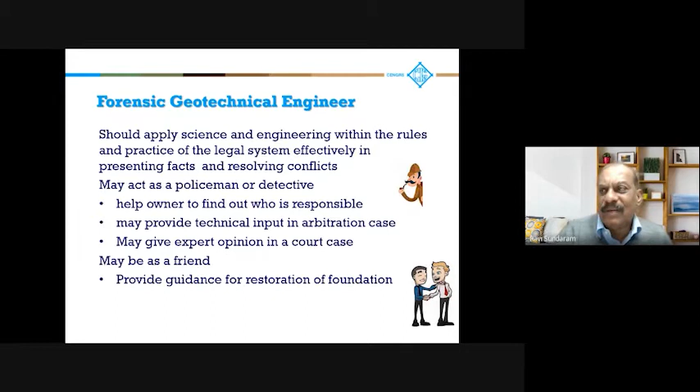So the forensic geotechnical engineer should apply the science and engineering within the rules and practice of the legal system to effectively present the facts and resolve the conflicts. As I told you, you may act as a policeman or a detective to help the owner find out the problem, who's responsible, or he could be a friend.

Forensic geotechnical engineering obviously involves identifying the problem, investigating the root cause, assessing the risk, reviewing the structural and geotechnical data, structural details, geotechnical data, predicting your foundation behavior, performing a back analysis if the data is available, identifying the causes of failure and risk.

So forensics basically involves examining the evidence and trying to figure out exactly what happened, and then you could develop technically feasible solutions, review merits and demerits, select the final solution, implement and monitor that solution, and mitigate foundation distress.

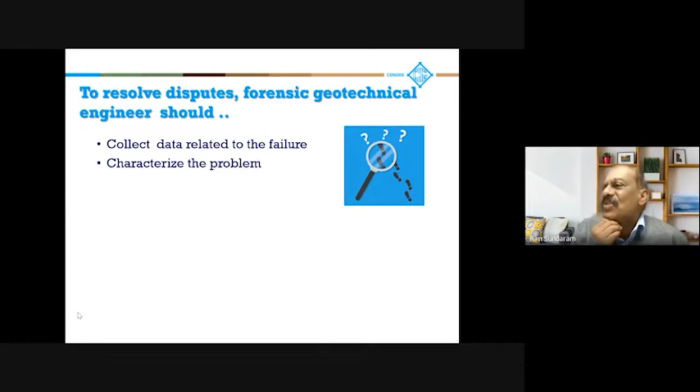To resolve the disputes, the forensic geotechnical engineer should collect data related to the failure, characterize the problem, develop a failure hypothesis, perform a realistic back analysis. That's the most critical thing. Record field observations and, if feasible, monitor the performance.

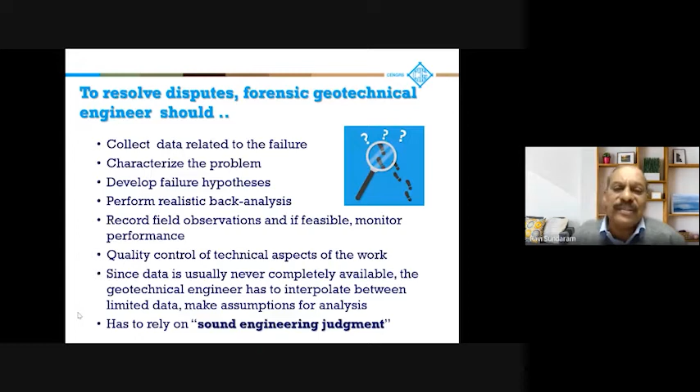Quality control of technical aspects of the work has to be done. Since data is usually never completely available, the geotechnical engineer has to interpolate between limited data and make assumptions for the analysis. So therefore, he has to rely on sound engineering judgment. That's the key word here, sound engineering judgment.

Forensic geotechnics is as much an art as it is a science. Today morning, Professor Madhav must have talked about geotechnical engineering is a science, but its practice is an art. As far as forensics is concerned, the art and science merge together.

And then you come up with solutions. What are the alternate schemes? Review the merits and demerits of each scheme, recommend the final scheme, and then we have to implement it so that your project remains safe and sound.

Identifying the root cause, this is the most critical thing. When there is a distress, it could be foundation distress or a structural distress. As far as the geoprofessional is concerned, he has to act as a doctor with a healing touch, resolve the problem.

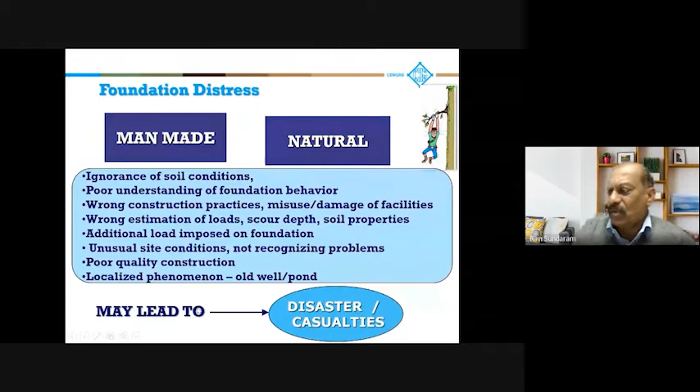So when we talk about foundation distress, we have settlements, shear failure, and serviceability issues. Settlements could be total settlement or differential settlement. And in serviceability, we could be talking of excessive settlement or a lower factor of safety or displacements which are not acceptable.

Basically, the approach is the same as forensic, preferably without involving the court of law. So the legal system here is the basis, but if we can bypass the law, the court, the problems could be solved much more easily by the engineers.

So to mitigate distress, you want to ensure that the desired factor of safety is achieved. You meet the serviceability criteria. Restrict further distress or settlement. If some settlement might have taken place, you want to make sure that there is no further settlement.

You may want to allow additional loads. The structure may have to carry additional loads. Maybe there is a vertical expansion or additional kind of stresses coming on the foundation. And to facilitate adjoining constructions, make sure that there is no disturbance to the adjoining construction.

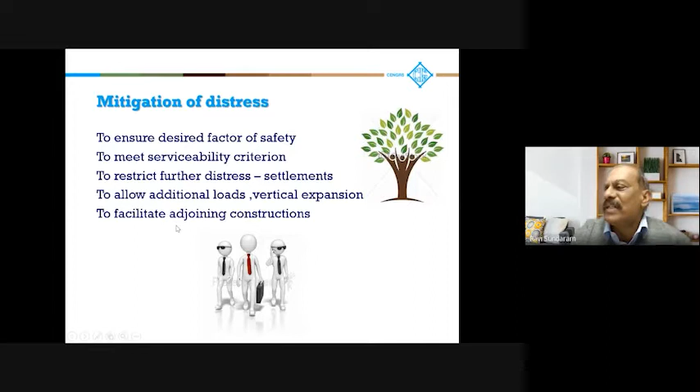So if you look at mitigating distress, what you are looking at is you want to know the geology of the area and the soil details, the foundation details. Select the adequate, correct techniques for investigation. What kind of tests need to be done? Perform these tests and then assess the reasons for failure, the nature of distress. Select your design profile and do your analysis to assess how this problem can be solved.

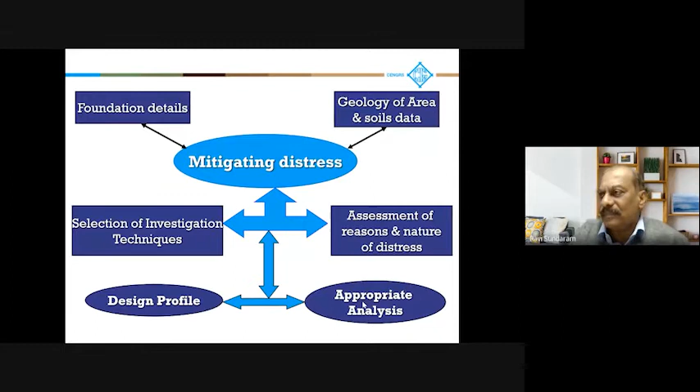Ideally, to mitigate distress, you would want to take steps before the disaster strikes, or on noticing the first signs of failure, take preventive actions to avoid it. An experienced engineer can identify telltale signs of potential failure and suggest remedial measures. If implemented in a timely manner, the failure can be avoided or at least its impact minimized.

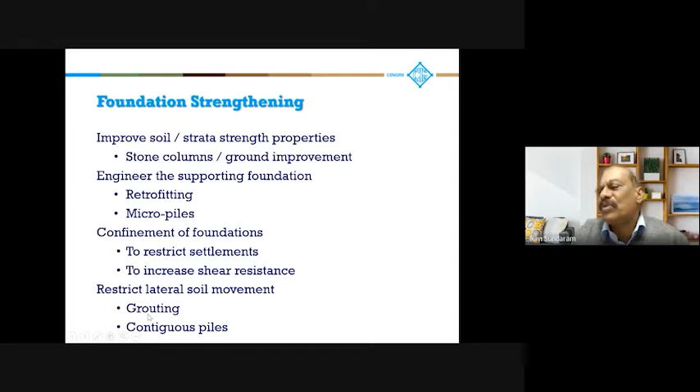Various foundation strengthening measures are available, just a brief list, there are many more. You may want to improve soil strength characteristics, go for stone columns or other ground improvement techniques, engineer the supporting foundation by retrofitting or micropiles. Confinement of foundations may be done to restrict settlement and increase shear resistance. Restrict lateral soil movement by grouting or contiguous piles.

Why distress occurred is something we have to understand. If there is an actual failure, we may be able to back calculate the soil parameters, so then you can do your design accordingly. If there is a partial distress or a serviceability problem, you may not be able to do the back analysis, so it requires the ingenuity of the engineer.

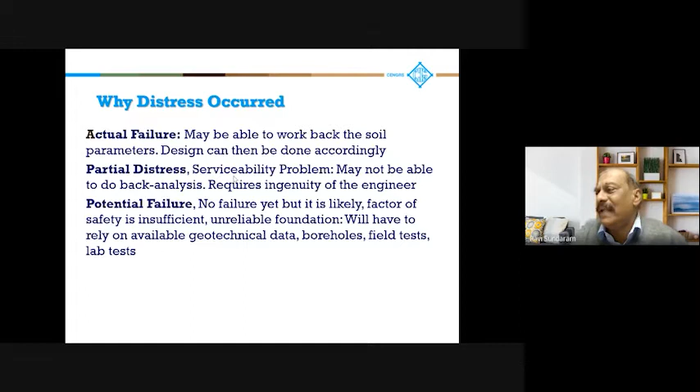A potential failure, no failure yet but it is likely, may occur when the factor of safety is insufficient or you have an unreliable foundation. You have to rely on available geotechnical data, boreholes, field tests, and lab tests, and try to figure out if something is likely to happen.

So we need effective solutions in all these cases that can be implemented easily within a short time span, with locally available technologies that are cost effective.

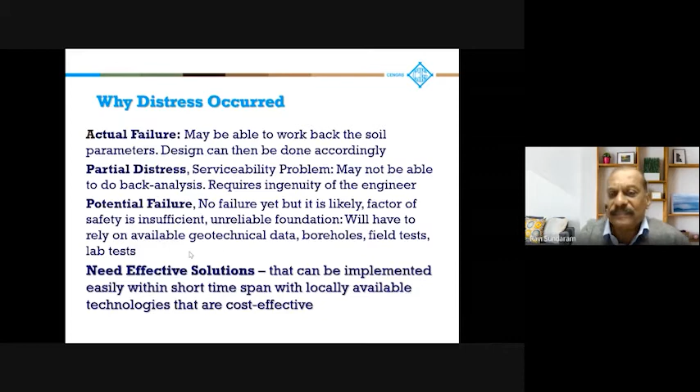What went wrong, where, and why - these are the 4 W's of forensics. The 4 W's guide any forensic investigation and are the key to understanding the problem and developing an appropriate solution. This can guide you towards a solution, where you assess the likely foundation system required to ensure the structure is safe.

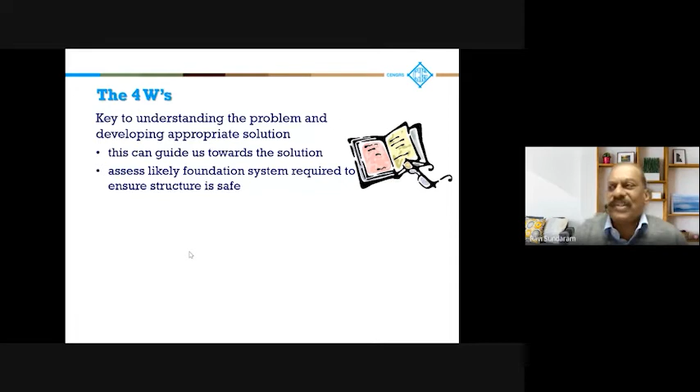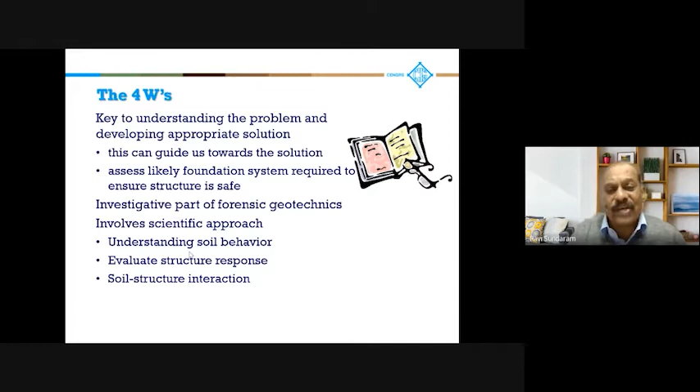This is the investigative part of forensics. When we talk about forensic geotechnics, we are investigating the reason why the failure occurred or is likely to occur. It involves a scientific approach. Understanding of soil behavior is most important, and then evaluating the structural response and soil-structure interaction. Understanding what triggered or caused failure can provide insight to the type of restoration required.

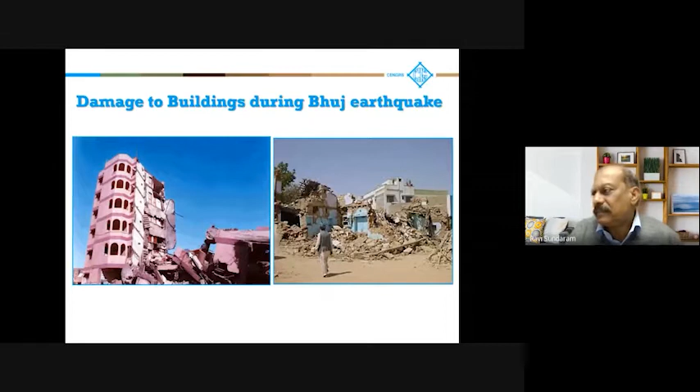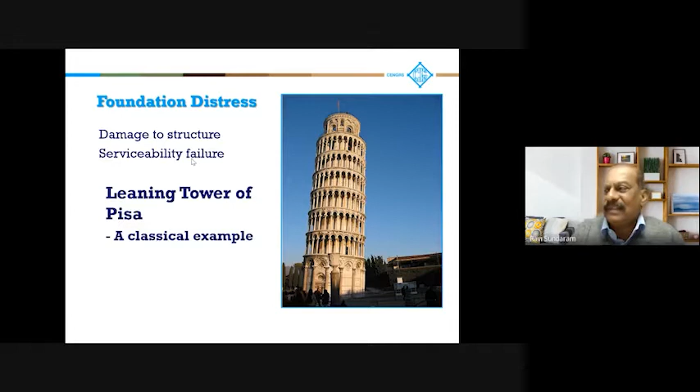The famous Leaning Tower of Pisa is a classical example where the structure is still standing. The main problem is serviceability - there is still no damage, and various techniques have been used to stabilize the tower and keep it at the same angle without further distress.

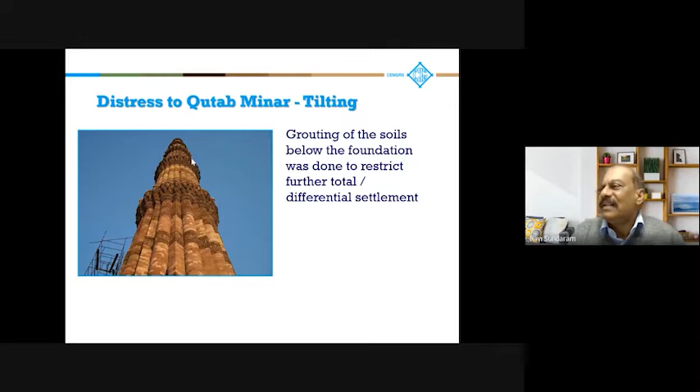Qutab Minar has also undergone some tilting, and some grouting has been done below the foundations to restrict further total and differential settlement.

Now I shall be presenting 3 case studies to demonstrate the application of the principles of forensic geotechnics, primarily the 4 W's, to understand how when there is a failure, we can approach the problem and resolve it.

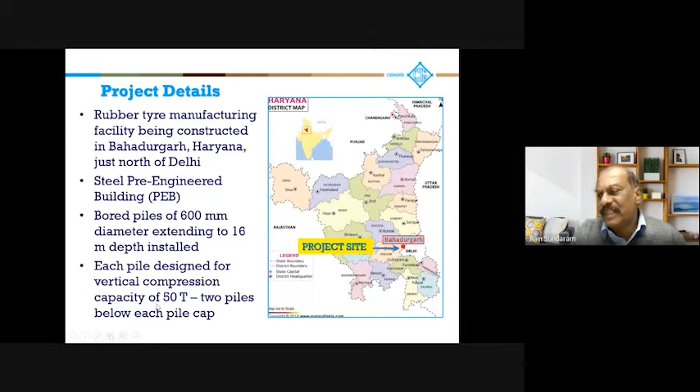Steel pre-engineered buildings were under construction. Bored piles of 600 mm diameter, extending to 16-meter depth, were installed. Each pile was designed for a vertical compression of 50 tons, with 2 piles provided below each pile cap.

During the erection of the steel structure for the pre-engineered building, settlement was observed in some of the pile caps. The measured settlements were more than 50 to 100 mm in some places. Substantial settlement was observed in the pile cap at grid BB18, which was the location of maximum settlement.

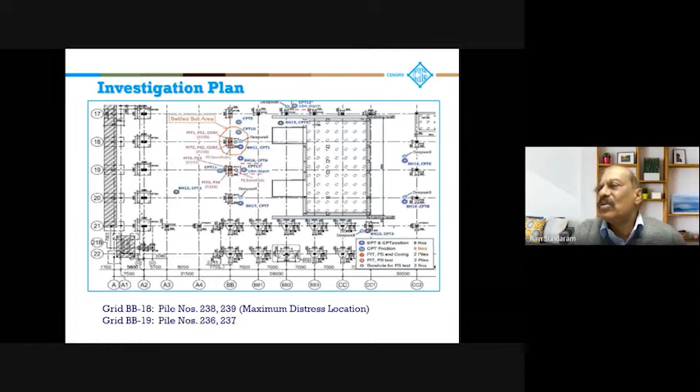This is the BB18 foundation. At BB19 also there was some distress. Pile numbers 238 and 239 were in BB18, and 236 and 237 were there. A detailed investigation program was developed.

So this is the BB18 investigation for the failure. We'll get back to you, I'll explain what we did.

The forensic post-failure study was undertaken to find out the underlying cause of the settlement prior to suggesting remedial measures. So the investigation was done in 3 phases.

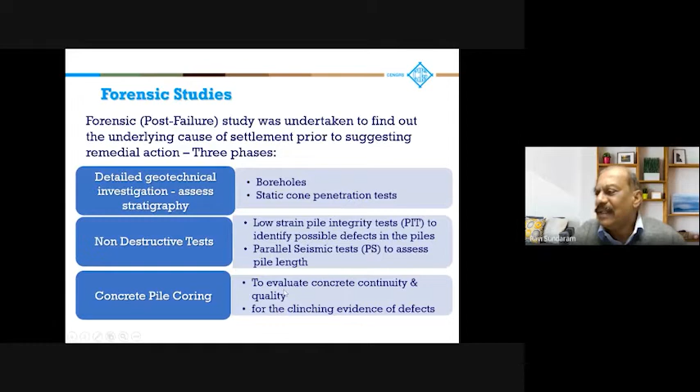One was a detailed geotechnical investigation to assess the stratigraphy, including boreholes and static cone penetration tests. Then we did some non-destructive tests: low strain pile integrity test (PIT) to identify defects in the piles, and parallel seismic tests to assess the pile length. Then we did some concrete coring to evaluate the continuity of the concrete in the pile and to assess its quality for the clinching evidence of the defects.

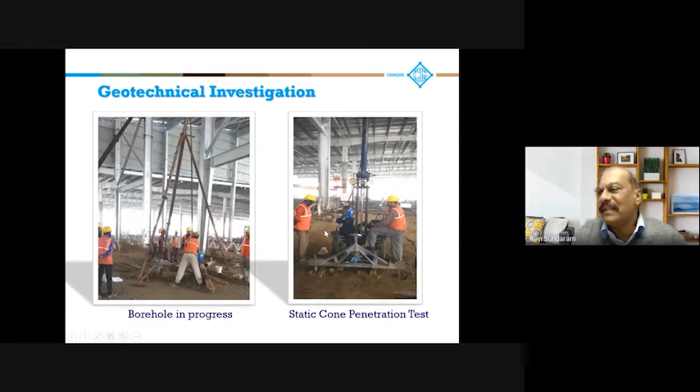The typical borehole data—this is part of the Indo-Gangetic alluvium. So what we were getting is sandy silts to 9 to 12 meter depth, and then we had sand layers below that, and then again sandy silt. What is of main concern is that if you look at the SPT values here, very low SPT values, 4 to 6 in this borehole.

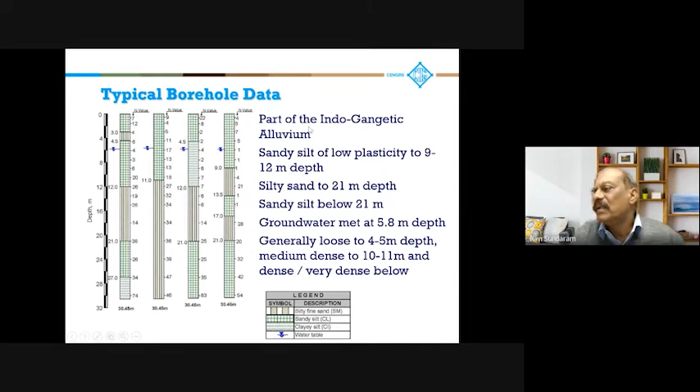Similarly, low values in this particular borehole. This one had a lot of loose soils down to about 14 meter depth, and this other borehole, also in BB18, showed very low SPT values, as low as 1, up to about 14 meter depth. So that was the strata condition.

A similar profile was seen in the static cone penetration test. A few of the tests showed very low results of cone tip resistance up to 14, 15 meter depth, mostly up to 12 meters showing low values in BB18 and BB19.

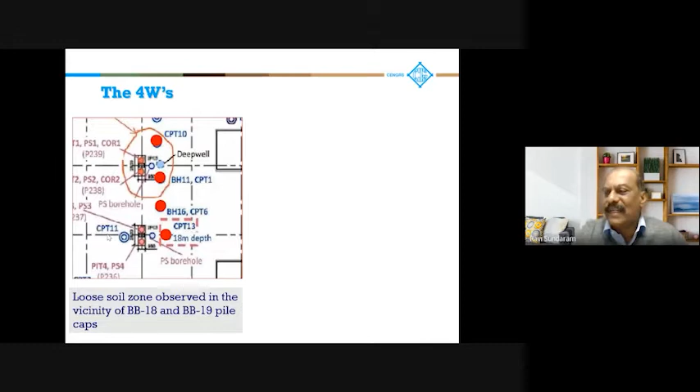Now I come to the assessment of the problem here. Number 1, it is clear that loose soil is observed in the vicinity of BB18 and 19. Two theories were put forward: that in situ conditions were varying—this was unlikely in this area.

Migration of fines caused by an improperly designed well point system located at a distance of about 10 to 15 meters—this seemed to be the most likely case for why the soil up to 14, 15 meters was loose, because of the migration of fines and low SPT values, whereas the other boreholes were showing better results. It is clear that the pile settlement was triggered by the reduced geotechnical capacity in these loose zones.

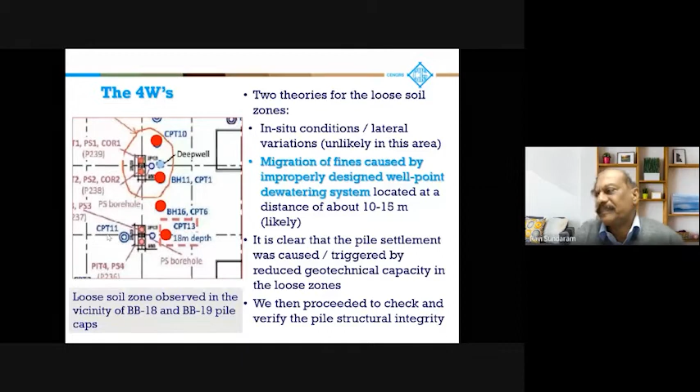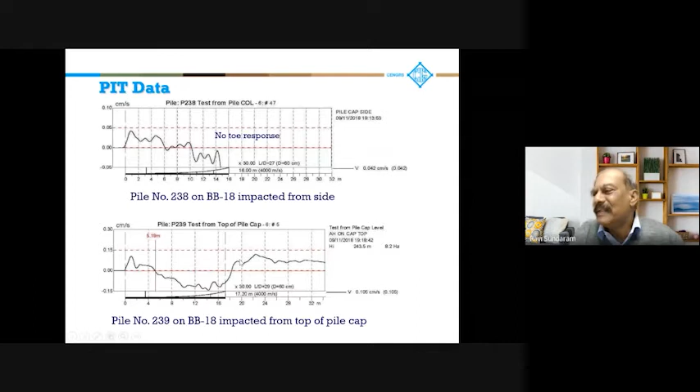So I look at this pile from P238 on BB-18—we found there was absolutely no toe response when we impacted it from this side, and when we impacted it from the top, again what we got was a weak toe. So it obviously means that there's some problem with the pile tip.

So this is the summary of the results. For pile 238, poor data shows that the result is inconclusive. Obviously, the quality of the data was inconclusive because the pile concrete quality was poor, and there was hardly any toe.

There was a strong reflection at 3 to 4 meter depth, indicating a major defect at that depth. In 239, the data indicates that either there is a defect at 6 meter depth, or the wave could not penetrate below this level.

You can see all these tests, the conclusions are after so many tests were repeatedly done on the piles, so that we just made sure that there is no error.

239, this one showed weak toe reflection at the anticipated pile tip level. And when we dismantled the pile cap, we could get a reflection at 3.5 meter depth. This showed that this could be due to bulging of the pile.

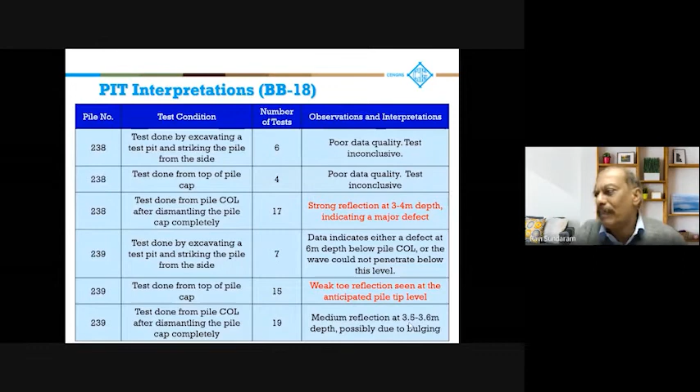So the PIT data did not match the expected trends, suggesting that there are possible defects. Both the piles, pile caps exhibited strong reflections at 3 to 5 meter depth, which masked the deeper data.

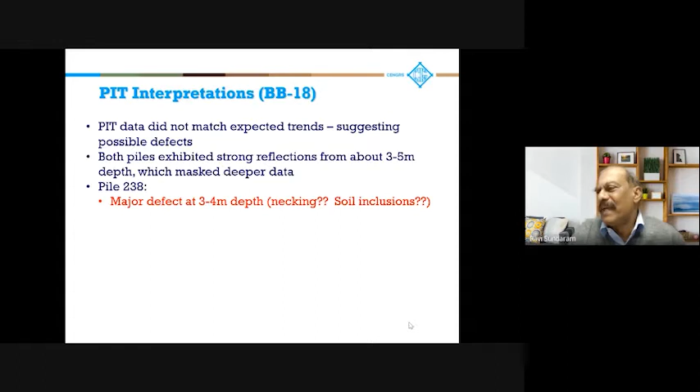In pile 238, there was a major defect of necking or soil inclusions at 3 to 4 meter depth. In 239, there was bulging at 3 to 4 meter depth, and probably collapse of the loose sand occurred during the pile boring. I'm not sure whether the pile contractor used a liner or not, but the bore has collapsed there. The pile length may more or less be okay, but the data is uncertain.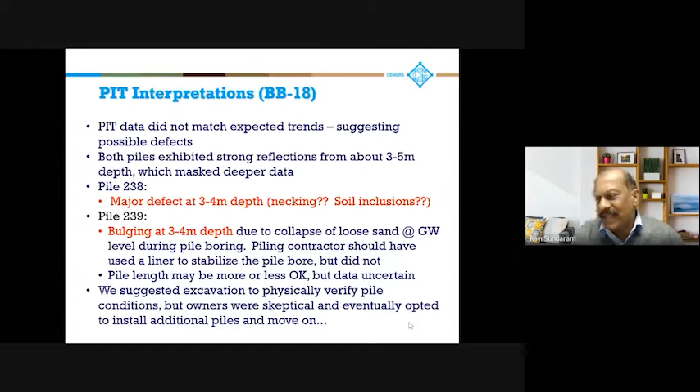Then we suggested to physically excavate and verify to about 3-4 meter depth, but the owners were skeptical. We eventually opted to install additional piles and move on.

But then we did further investigation by what is known as the parallel seismic test. So this was the pile cap, and a bore of 150 mm diameter.

It was done to about 30 meter depth, or 14 meter below the anticipated pile level, at a distance of about 1-2 meters from the pile. The borehole was cased with a 3-inch PVC casing and grouted with a cement bentonite mix, so that we have a stable hole. And the pile cap was impacted using a Teflon tipped hammer, and geophones were lowered into the hole, and the response was recorded.

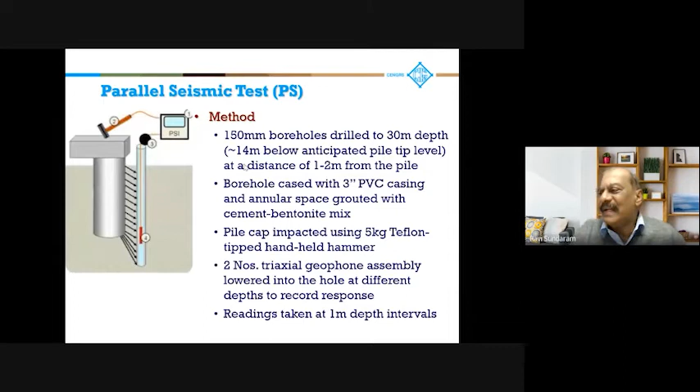Readings were taken at every 1 meter depth interval. So the concept is that you look for changes in the arrival time of the wave at the geophone location. The software computes the wave velocity based on the traveled time, distance, and the arrival time.

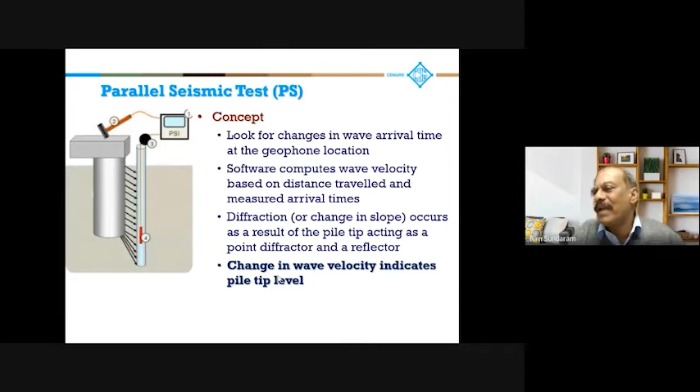The diffraction or change of slope occurs as a result of the pile tip acting as a point diffractor and a reflector. So changes in the wave velocity indicate the pile tip level. The wave would be traveling in soil rather than pile concrete.

238, it did not show any change of slope. This means it's a bad pile. At 239 pile, this showed a change of slope at 13 to 14 meter depth. So we should have expected a 16 meter long pile. So this is probably a short pile.

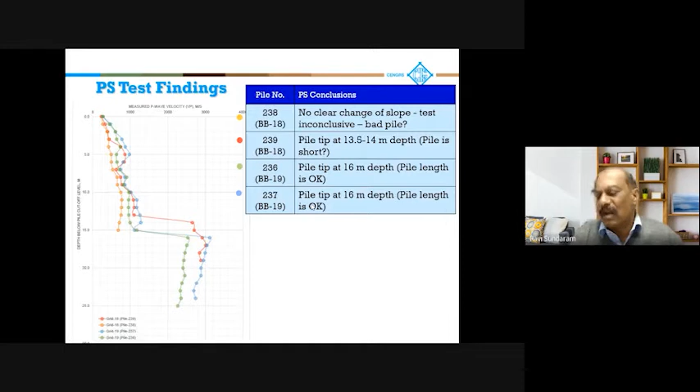236 and 237, these showed nearly 16 meter long pile. So this seems to be okay. So the key findings are that the data quality at P238 is poor, probably due to the presence of loose soils or structural defects in the concrete. 239 actually indicated shorter piles. At BB19, the pile lengths were okay.

Next, we went to coring through the pile. The objective was to confirm the structural quality, integrity, and continuity, so that you can confirm the findings of the PIT and parallel seismic test.

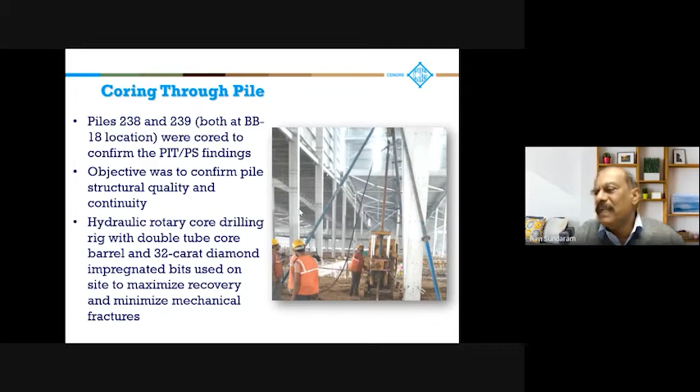So hydraulic core rotary drilling was done with a double tube core barrel, 32 carat diamond impregnated bit, to maximize core recovery and minimize mechanical fractures. This is the core concrete coring in pile 239. You can see here fractured core, and then soil and weak concrete was encountered below 12.5 meters.

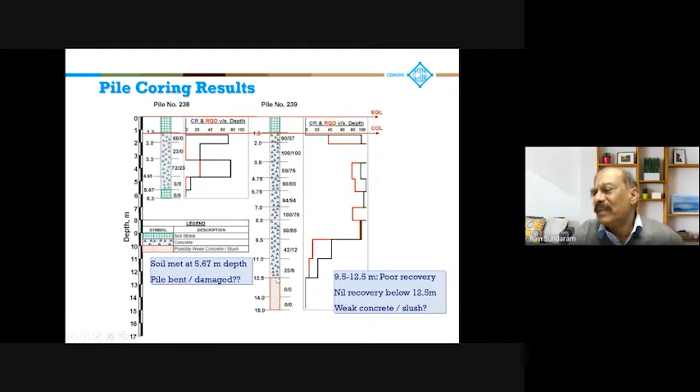This is the picture of the coring and RQD quality. So in this pile 238, in fact, we entered soil at 5.67 meters. This gave the question that probably the pile is bent or damaged, and there's no pile below 5.67. Pile 239, 12.5 meter was the concrete, and then it was showing soil below.

So this is the summary of those results, the coring observations. Bent reinforcement pieces were found in the last core run, and the pile was probably inclined and possibly damaged. Soil was encountered below 5.67 meters.

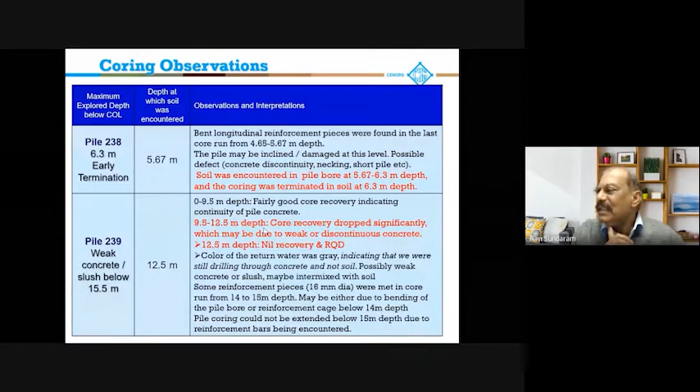In the other pile, core recovery dropped significantly due to weak, discontinuous concrete, and at 12.5 meters there was nil core recovery. The color of the return water was gray, indicating we were still drilling through concrete, not soil—probably weak concrete or slush, maybe intermixed with soil. There was also reinforcement encountered at 14-15 meter depth, either due to bending of the pile bore, or it may have gotten damaged. But there were issues.

The conclusion was that the geotechnical investigation revealed loose soil zones, and pile 238 was damaged and discarded. For pile 239, its capacity was reduced due to poor bottom cleaning. Additional piles were installed at the BB 18 location, and a similar approach was used for BB 19. The study successfully investigated the root cause of the failures, thus paving the way for remediation.

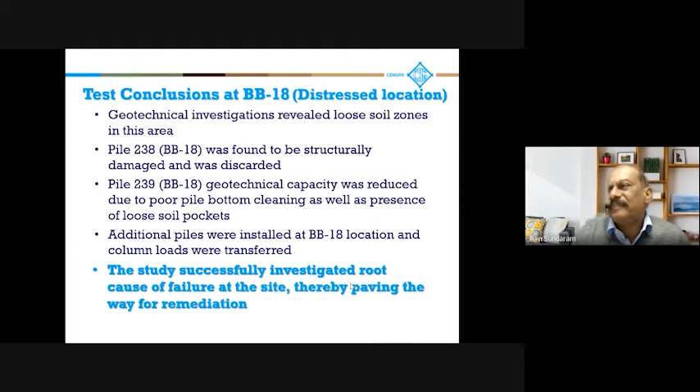I now come to another case study.

This is an overhead tank on loose boulder fill in Gwalior, Madhya Pradesh. An 18-meter overhead tank close to an existing school was planned, located in a congested area of Gwalior near the famous Gwalior fort, close to what is called the Kila Gate. There was heterogeneous loose fill of stones and boulders, probably discarded during construction of the fort, built in the 15th century by Maan Singh Tomar.

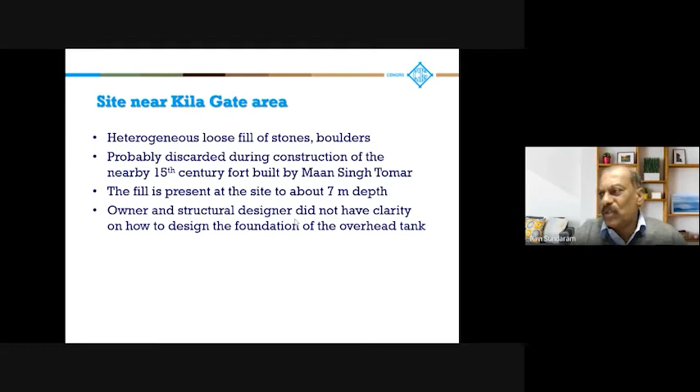The fill extended to about 7-meter depth. The owner and structural designer did not have any clarity on how to design the foundation for the overhead tank. The result was an unsafe and unreliable design.

A routine geotechnical investigation was done. The standard specification said boreholes should go to 15-meter depth or refusal, whichever is earlier. Refusal to the SPT was encountered right at the ground level itself on the boulder fill, so obviously no data was collected.

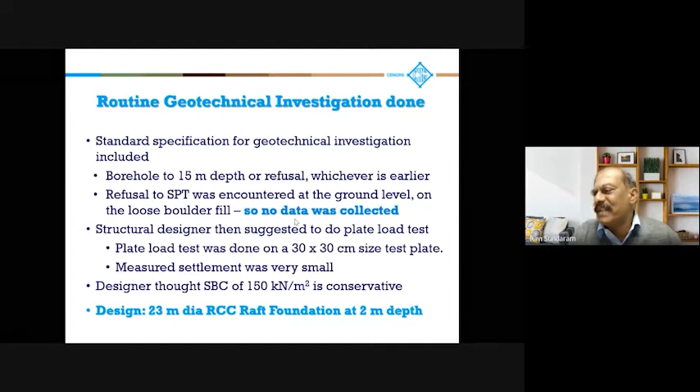The structural designer then suggested doing a plate load test, which was done on a 30 by 30 centimeter test plate. The measured settlement was very small, so the designer thought using an SBC of 150 kilonewton per meter square was conservative. As a result, he designed a 23-meter diameter RCC raft foundation at 2-meter depth.

Then they started the excavation. When they excavated to 2-meter depth, they found boulders, and continued excavating further to 4-meter depth. At 4-meter depth, a heterogeneous mix of stones and boulders in a sand matrix was also met. The contractor panicked, and the owner was concerned that the strata may not be a suitable bearing material.

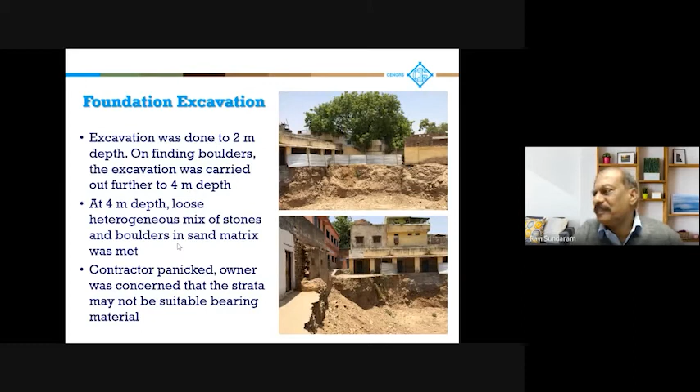At that point, the client requested IIT Delhi and Cengrs to evaluate the conditions and suggest a solution. The site conditions looked like this at the 4-meter depth excavation—stones, gravel, and boulders in a sand matrix. Some of the stones may be part of stone masonry construction; the binding material probably eroded with time or got weathered, and loose pockets were observed in the fill.

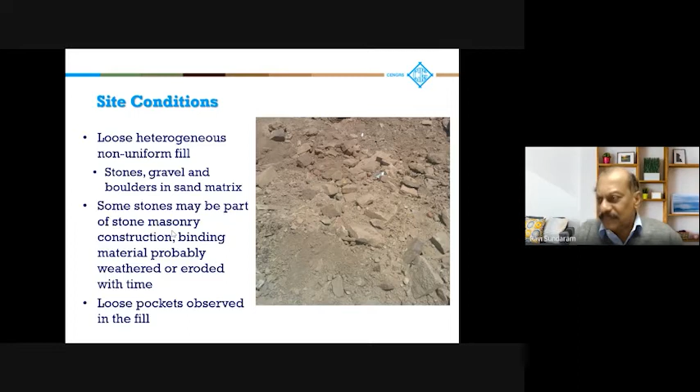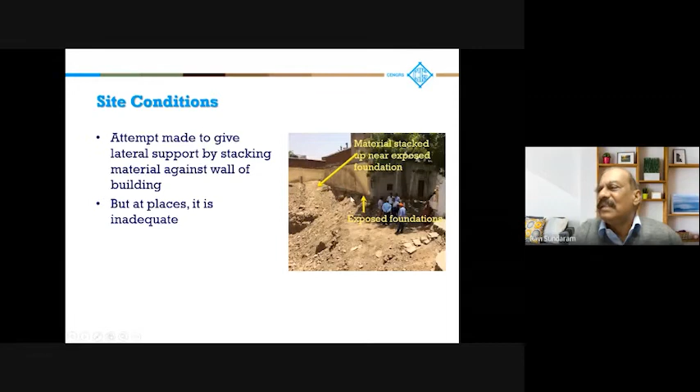Several buildings were constructed adjacent to this, in very bad, dilapidated condition, and excavation was carried out very close to these buildings with nearly steep slopes. Surprisingly, they were still stable. This is a loose stone fill on which a building has been constructed—you can see the condition; in places, the foundation has also been exposed. An attempt was made to give some lateral support by stacking material against the wall, but mostly it was inadequate.

So these were the site conditions, and the concern was the safety of the school building adjacent to the excavation. A cement mortar was used to stabilize some of those stones—obviously a very poor effort. They just applied some cement mortar and seemed to think they had done a great job there.

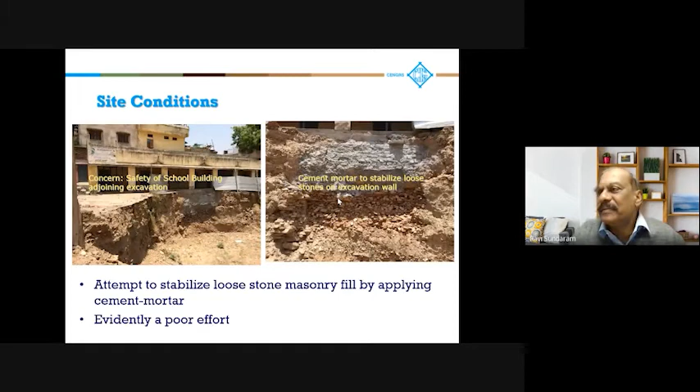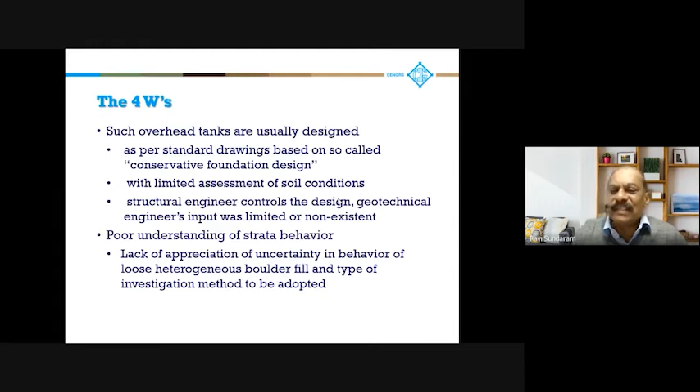Now I look at the 4 Ws for this case. Such overhead tanks are usually designed as per standard drawings based on a so-called conservative foundation design with limited assessment of soil conditions. The structural engineer controls the design, and the geotechnical engineer's input is limited or non-existent. There is very poor understanding of the strata behavior, and a lack of appreciation of uncertainty in the behavior of loose heterogeneous boulders, and of the investigation method needed to assess these problems. Since the contract had been awarded, the approved budget could not be exceeded—that was another issue.

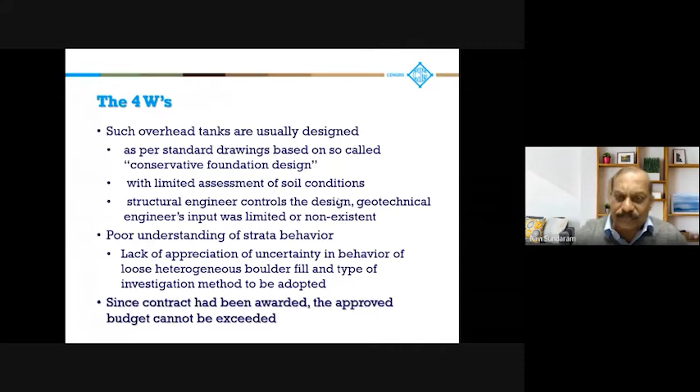An engineering assessment showed that the fill extended to 7 to 8 meter depth. Being loose and heterogeneous, it is not a reliable foundation bearing material, not suitable at all. And the available geotechnical data is insufficient.

No realistic data is there. Results of a 30 into 30 centimeter size test plate load test cannot be extrapolated for the design of a 23-meter diameter raft. No clear conclusion can be drawn. Evidently, it is not feasible to support the foundations on the boulder fill.

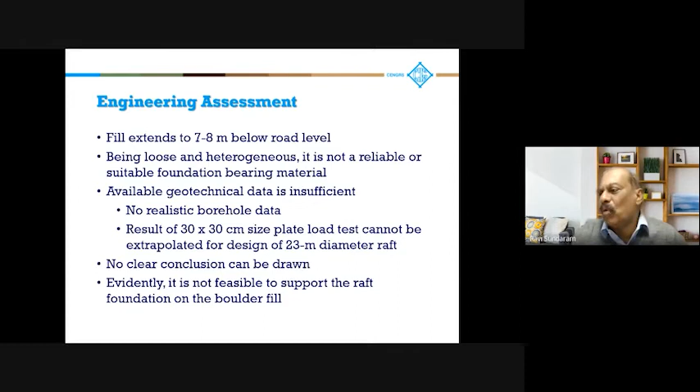So the action plan was first to perform a proper geotechnical investigation with at least 4 boreholes extending to at least 20 meters beyond the bottom of the fill. So we did the boreholes up to the 20 plus the 7-8 meters of filling. SPT and undisturbed samples were collected and a complete range of laboratory testing was performed.

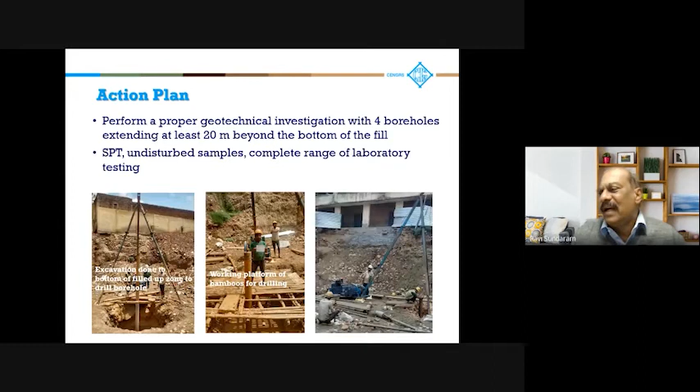So we had to excavate to the bottom of the fill zone and then erect a platform and then do the boreholes. Although the safety of the adjoining building was a big concern, no failure had been reported.

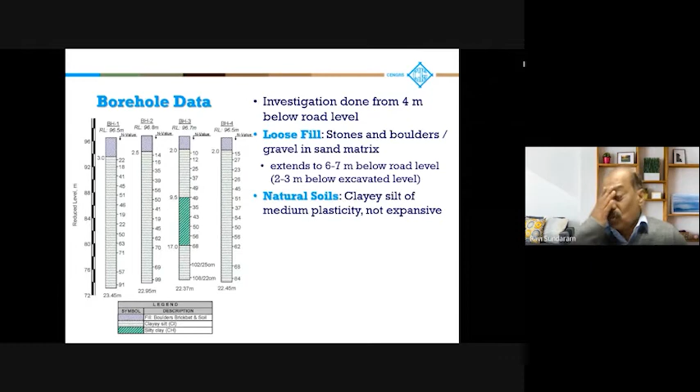The typical borehole data below the 4-meter level, we did another 2 to 3 meters of filling was met, making it around 7 meters. And below that, we got the natural soils which was clayey silt of medium plasticity. It is not expansive, it's an alluvium, extends to more than 23 meters below the excavated level.

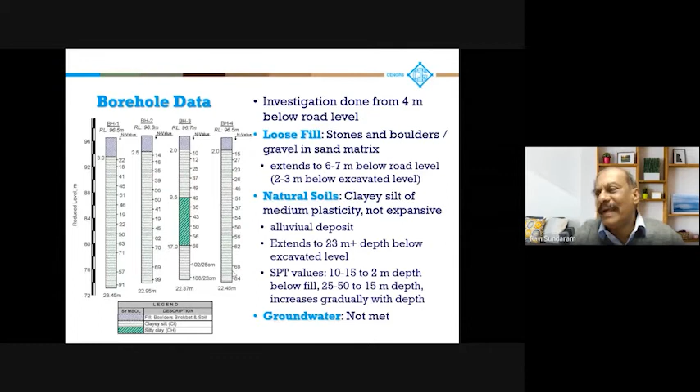The SPT values are about 10 to 15 to 2-meter depth below the fill. And below that, the SPT values are gradually increasing with depth, goes up to 50 at 15-meter depth and further increases to more than 80 to 100 at 23 meters. Groundwater was interestingly not met to the final explored depth of 23 meters.

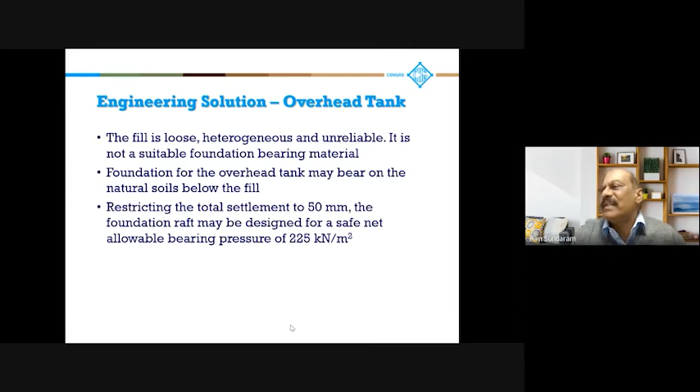So the engineering solution for the overhead tank was that the fill is loose, heterogeneous, and unreliable. It is not suitable foundation bearing material. The foundations for the overhead tank should bear on the natural soils below the fill, restricting the total settlement to 50 mm, although you could go up to 75 mm. We propose that the safe bearing pressure can be around 225 kilonewtons per meter square.

Accordingly, the raft diameter was reduced from 23 meters to 18.5 meters. This not only saves on cost, but also reduces the excavation size and avoids getting close to the adjoining buildings. So there is a little more safety there.

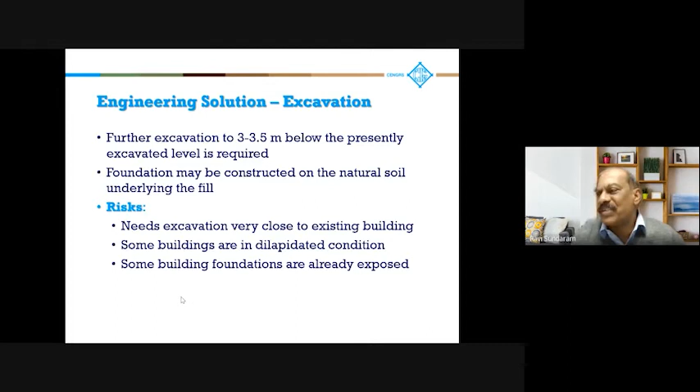Further excavation to 3.5 meters below the excavated level is required, and the foundation has to be constructed on the natural soils underlying the fill. The risk here is that excavation needs to be monitored since it is very close to the existing building. Some of those buildings are in quite bad shape, and some building foundations are already exposed.

The excavation is marginally safe, so the lateral support system which has to be provided depends on the extent of risk that the owner is prepared to take. So the excavation may be done in localized stretches with temporary support to the excavation in small stretches. Somewhat risky but economical, so worth taking.

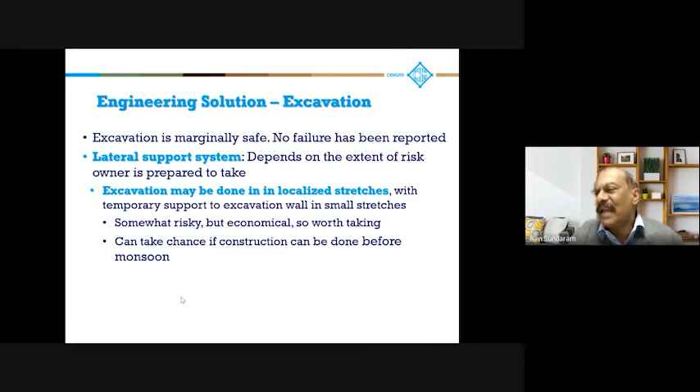You can take a chance if the construction is done before the monsoon, and there was quite a lot of time before the monsoon, so they could do that. Shotcreting the excavation face shall enhance the stability during the construction period, not the sketchy cement slurry which they had placed. A diaphragm wall, of course, was a continuous, reliable system, but it's very high cost, makes the project financially unviable. So I come to the last case study.

This was a deep excavation for a multi-story building in Gurgaon, in Haryana. The project details is that it's a 16-meter deep excavation for a building adjacent to a 6-story building. The building outer line is about 6 meters away from the edge of the basement, edge of the excavation. And the basement of the existing wall extends to about 5-meter depth below existing ground level.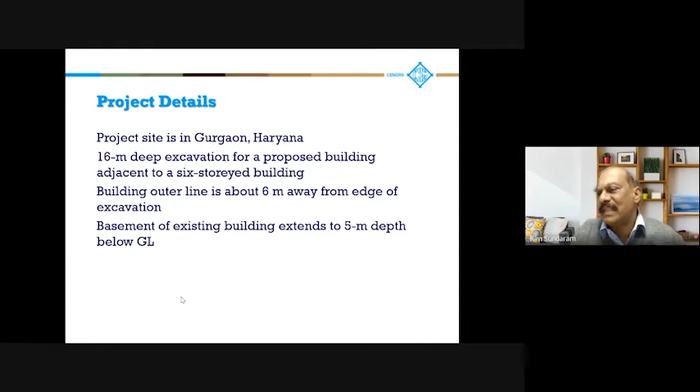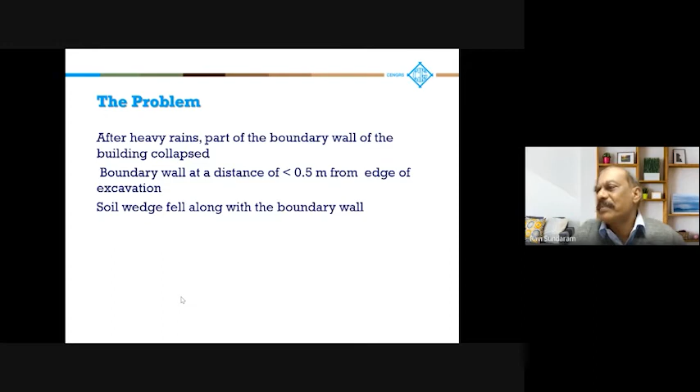After heavy rains, part of the boundary wall of the existing building collapsed, and the boundary wall was at a distance of less than half a meter from the edge of the excavation. A soil wedge fell along with the boundary wall.

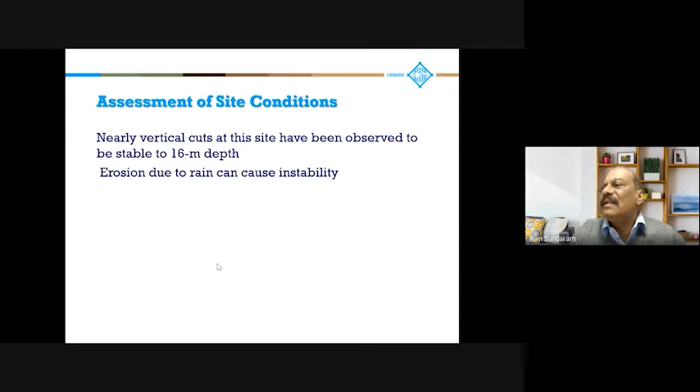Nearly vertical cuts at this site have been observed to be stable even to 16-meter depth. This soil is silt here. The erosion due to rain caused instability. The boundary wall is too close to the edge of the excavation. The exposed soils beneath the boundary wall got saturated during the rains, and this resulted in development of a slip circle, which caused failure.

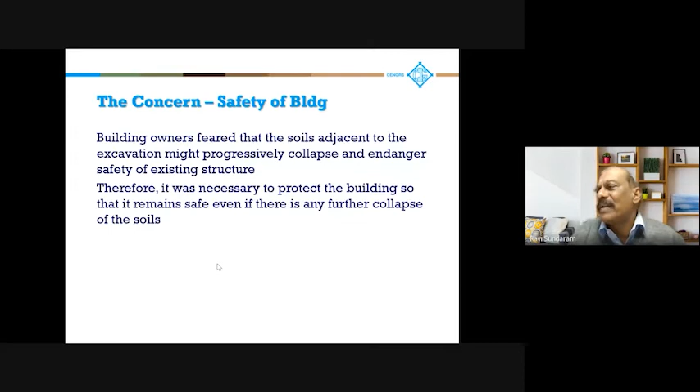The building owners feared that the soils adjacent to the excavation may progressively collapse and endanger the safety of their structure. Therefore, it was necessary to protect the building so that it remains safe even if there is any further collapse of the soils. The main problem was that the neighbors were panicking.

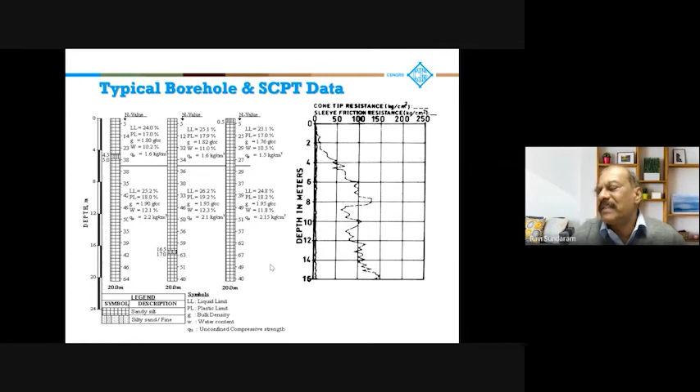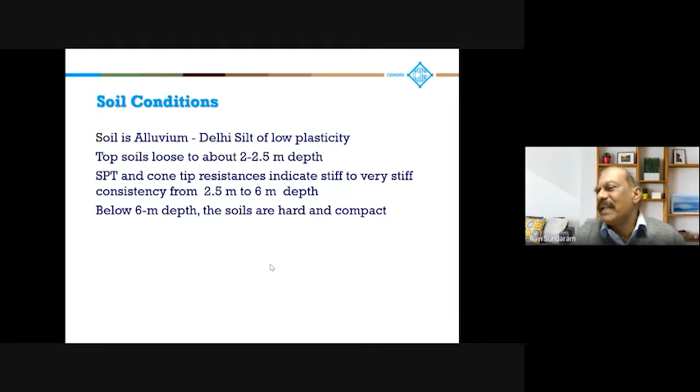Now the 4 Ws. The building appears to be safe in its present condition. To ensure the safety of the building during the entire construction period, precautionary measures had to be taken, primarily to convince the neighbor that it will remain safe. Possibility of further collapse of the soil needs to be arrested.

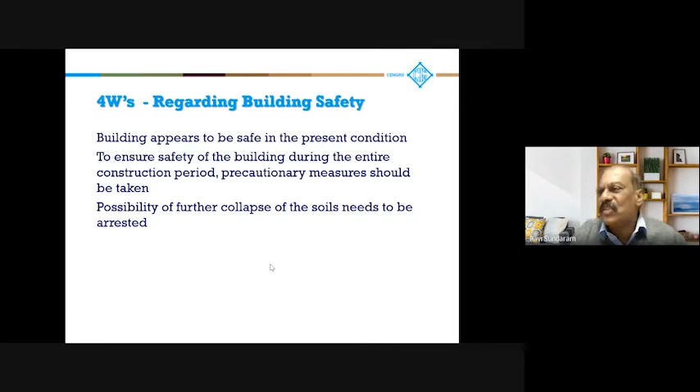So the proposed lateral support, which was done, was the cement grouting of the soils adjacent to the existing building. It was a time-saving and cost-saving effective solution, cost-effective. Grouting at closely spaced points can effectively create a grout curtain. This can provide sufficient lateral support of the soils adjacent to the building.

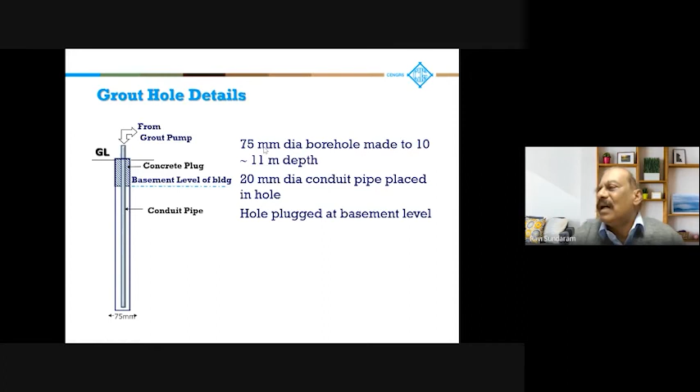So this is the approach that we had used. This was the borehole which was drilled, and a conduit pipe, and the conduit pipe was plugged at the ground level and at the basement of the building, and the 75 mm diameter hole was plugged at basement level, and cement slurry was pumped. So the grout consisted of

50 kg, or one bag of cement, in 100 liters of water at a pressure of 0.5 to 1 kg per centimeter square, gradually increased to 2 kg per centimeter square. The injection of the cement slurry was continued until refusal to further grout intake was met under a steady pressure of 2 kg per centimeter square. The cement slurry was agitated continuously during the process, during the pumping.

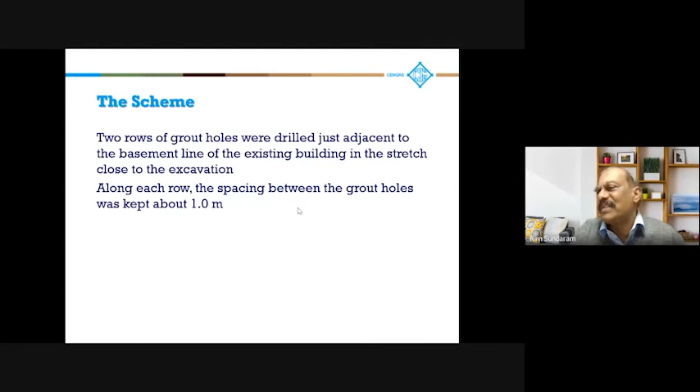So two rows of grout holes were drilled adjacent to the excavation, adjoining the basement line of the existing building, in a stretch close to the excavation. Along each row, the spacing was kept around 1 meter, center to center. So this is the scheme here.

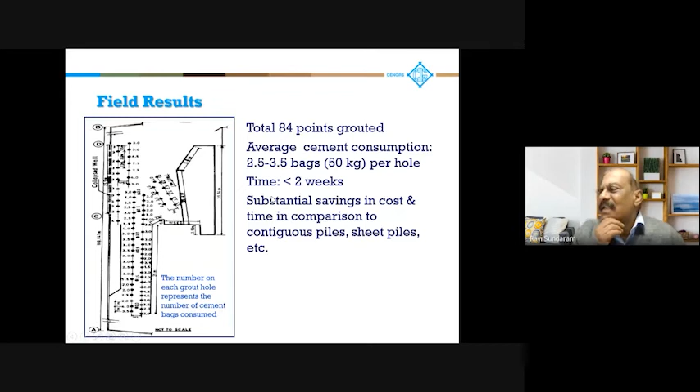This side is the excavation. So we had 2 rows of grout holes. Total 84 points were grouted. Average cement consumption was 2.5 to 3.5 bags of cement per hole. It could be completed in about 2 weeks' time. Substantial saving in time and cost in comparison to contiguous piles or sheet piles, etc.

So these numbers here, they are the number of bags of cement that went in. So this is the completed retaining wall after the grouting was done, and the new boundary wall being constructed on top of it afterwards. So the boundary wall was supported on 300 mm dia, 10 meter deep auger piles adjacent to the boundary wall, a basement wall.

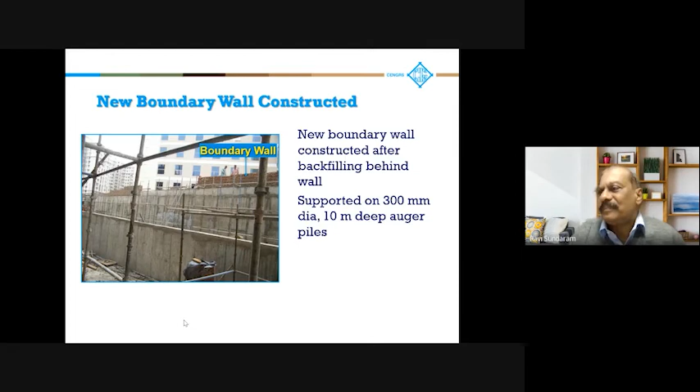So now I come to the lessons learned.

Geotechnical distress mitigation is one step before the court of law is involved, if at all possible. Try to resolve it mutually. It's not a fault-finding mission, but a fact-finding mission. The purpose is to save the structures from major disaster and damages.

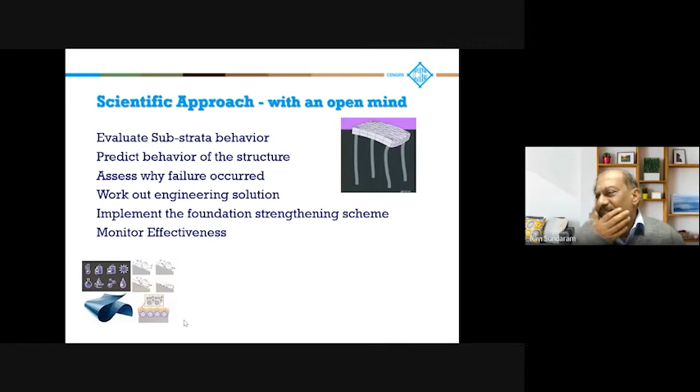So a forensic geotechnical engineer should be a doctor with a healing touch. The 4 W's are the key to the mitigation of foundation distress. You have to have a scientific approach with an open mind, evaluate the surface substrata behavior, predict the behavior of the structure, assess why foundation failure occurred or why it is likely to occur, work out the engineering solution, implement the foundation strengthening scheme, and monitor the effectiveness.

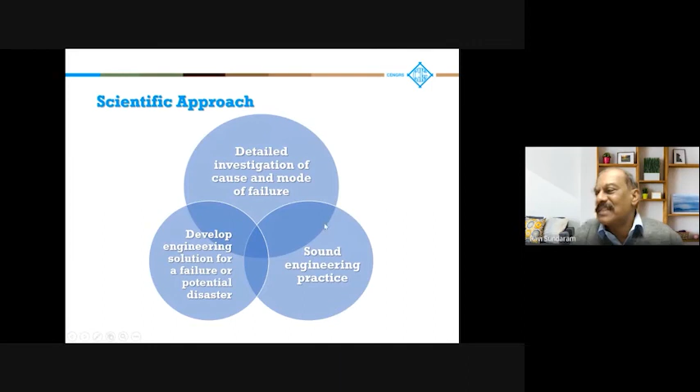Forensic geotechnics is as much an art as it is a science. Detailed investigation into the causes and mode of failure, developing engineering solutions for the failure or potential disaster. Everything needs sound engineering practice.